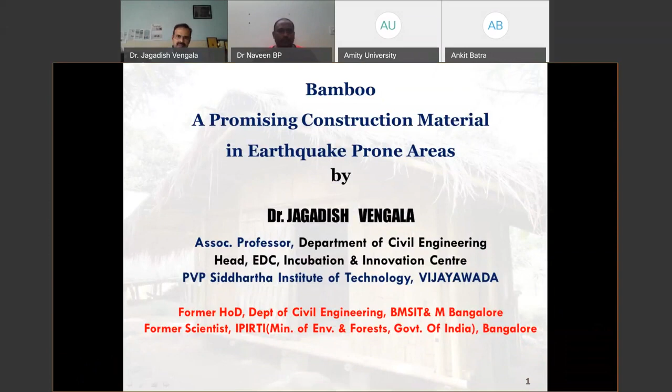The outline of my presentation goes like this. I will give a brief introduction about bamboo and bamboo-based construction, and then talk about my time working in a Government of India organization called IPIRTI, where we developed a bamboo housing system. Briefly, I'll give you some engineering properties of bamboo that I tested over a period of time as part of my thesis and my work. Having tested the properties of bamboo, we also tested various elements in the housing. I will show you how a 2-story bamboo house looks like, and some of the performance tests conducted. At the end, I'll discuss how it performed as an earthquake-resistant material with tests we carried out on a shake table. Finally, I'll end my presentation with brief conclusions. After my presentation, I will answer some of the questions raised by the audience.

With a brief introduction about bamboo, I'll start. In India, there are about 125 indigenous and 11 exotic species, belonging to different genera. Bamboo comes from the grass family, and bamboo availability is about 14 million hectares in India.

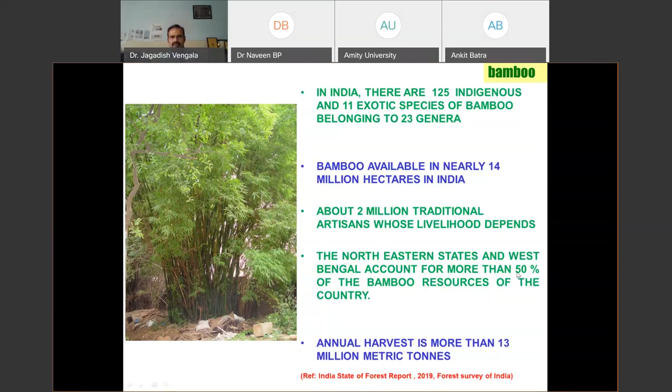Out of the total bamboo, as I mentioned, most of it grows in the northeastern part of India. You can see this on the map, along with Madhya Pradesh, Maharashtra, and other places.

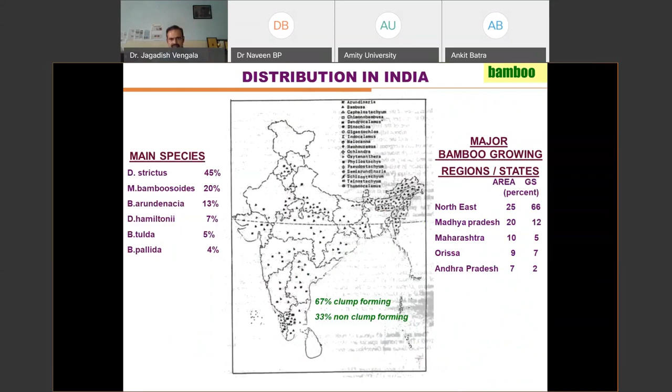That means for each rhizome, one single bamboo comes out in case of the monopodial, whereas sympodial has a number of bamboos. That is how it forms the clump and non-clump types.

An interesting thing to know is that in 2017, the Indian Forest Act was amended, particularly for exempting bamboo grown outside forest areas, so that you can cut it and use it for different purposes. It's not like when you have to cut a tree in your campus, where you need permission from forest officials. By amending the Indian Forest Act of 1927, the felling transit permit for transport and economic use has been removed. This is based on the Indian State Forest Report.

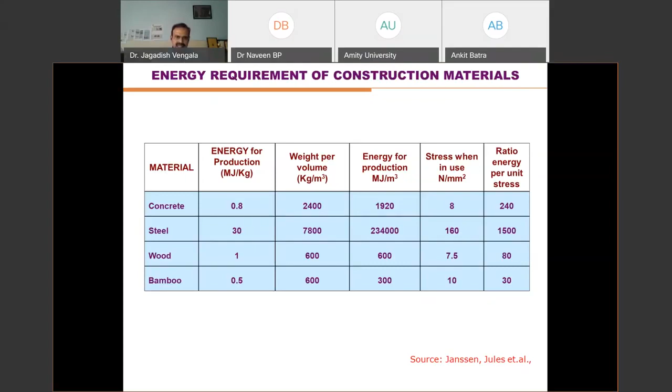Based on calculations made by Jules Janssen, a very good researcher in this area, when you compare different materials in terms of energy production per kg of material, bamboo is clearly promising compared with other building materials. Even when you calculate the ratio between energy per unit stress, bamboo gives a promising value compared with other building materials like concrete, steel, or wood.

As civil engineers, we need to understand the orientation of fibers and their properties. Bamboo is hollow inside, and between two nodes this hollow portion exists. If you split it vertically, you can see both halves of the split bamboo. This solid disc portion is called the node. Between two nodes is the hollow portion, and all the fibers run parallel to the axis of the culm.

Species to species, there is variation because one particular species has more fibers within the system. If there are more fibers, you need more energy to fracture the material. That is the difference between different species.

When you try to nail the bamboo, what happens? These longitudinal fibers give way to the nail, unlike wood. Wood contains radial fibers, so it takes the nail into it. But in case of bamboo, if it is thin-walled, this is called the wall portion - that is outside diameter minus inside diameter. If it is thin in nature, when you nail it, it gets split because the fibers give way to the nail. So you have to carefully work with bamboo.

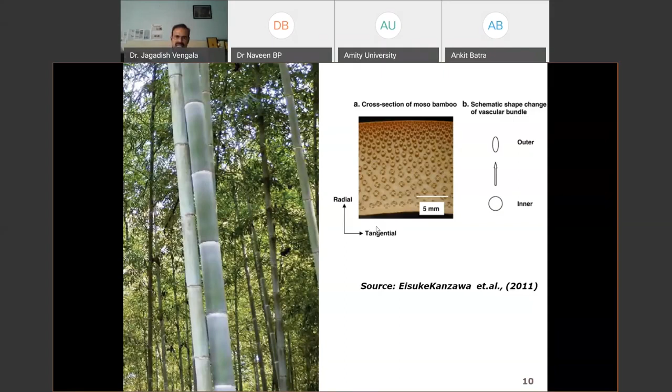Bamboo is used for various purposes. If it is less than 30 days, it is good for eating - a lot of people make pickles and curries in Northeast India. At 6 to 9 months, bamboo is tender; you can take out slivers and weave baskets and other furniture. At 2 to 3 years, they again make slivers or strips, which can be converted using resin into composites like bamboo matboard or corrugated sheet.

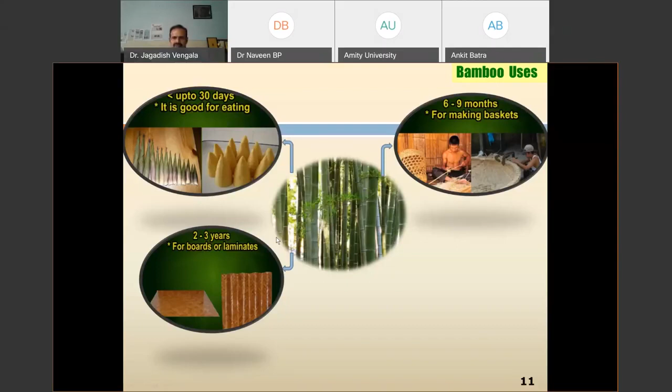A number of composites or laminates can be made out of bamboo strip or sliver-based composites. At 3 to 6 years, bamboo is generally used for construction purposes. After 6 years, since it is exposed to weather, it gradually loses strength. So it's better to choose bamboo of age 3 to 6 years.

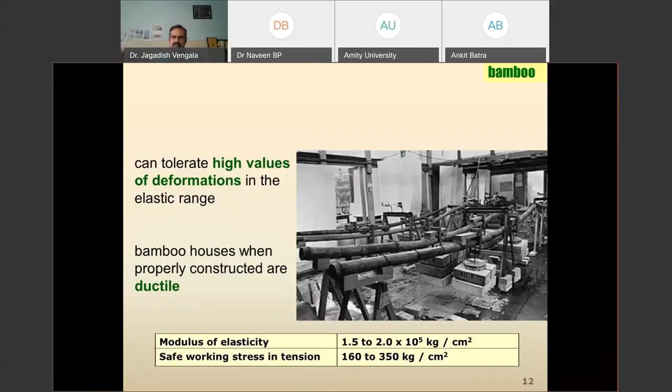When you apply load, it deforms. So bamboo can tolerate high deformations. It is obvious that when you make a house using bamboo, those houses are ductile in nature. And these are the traditional bamboo houses you can see in the Northeast.

They also flatten the bamboo. They split it into two halves, and then flatten it. These flattened bamboos are weaved, and they can make bamboo mat boards. These mat boards are used as walls. It's like fabricated walls, where they make a framework using wood or steel, and then place these mat boards to build the houses.

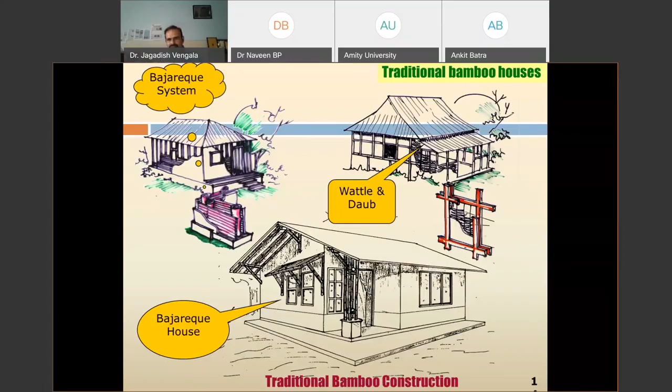These are the typical kinds of houses you see in the northeastern part of India. There are traditional bamboo houses practiced in various parts of the world, like the kind of houses you see in Colombia and South American countries - bajareque system, wattle and daub system. You can see bamboo strips placed within a frame, then weaved and plastered. These kinds of houses have proven to be earthquake resistant.

There is also a problem with the difficulty in joining various elements, and lack of structural design data - till recently there was not much data available with us. And then there's exclusion from building codes.

An interesting point to mention: till 2005, the National Building Code of India never mentioned bamboo as a building material. For the first time in 2005, the National Building Code of India, Part 6, Section 3 - earlier they used to talk about only wood, and then they divided Section 3 into Section 3A and Section 3B. 3A talks about timber, and now 3B talks about bamboo. You can find it under Part 6, Section 3B, covering bamboo and its various properties.

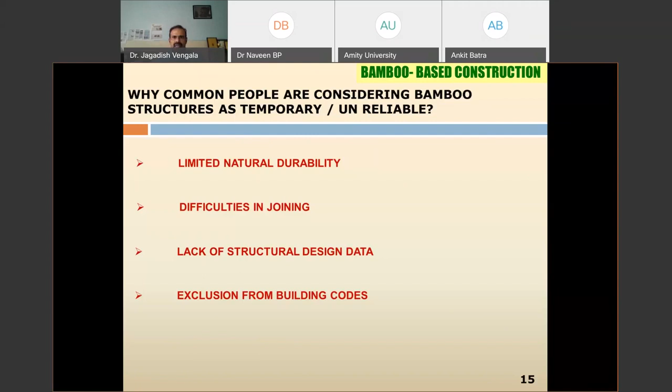Over time, natural durability has been addressed by giving suitable treatments - there are a lot of preservative methods and chemical treatments available, and many joinery methods were developed. Because of the work of various researchers and scientists, a lot of structural design data has been generated, and people started using it. This is why, for the first time, the National Building Code of India 2005 included bamboo as one of the building materials.

As I mentioned, bamboo can be converted into composites - bamboo mat boards, that is flat boards, and even corrugated sheets or veneer composites. How do they do this? Usually, the tender bamboo is converted into slivers. These slivers are weaved to make mats using weaving patterns. There are generally two types of weaving patterns.

One is the rectangular pattern, and the other is the herringbone pattern. Various studies conducted on these two types of patterns found that the herringbone pattern gives more strength, particularly when converted into a composite material.

So that is how you use these mats. These mats are dipped into resin, and then the dried mats are placed again on a hot press. If it is a flat die, you get the flat board. If it is a corrugated die, you get the corrugated sheet. You can see both components.

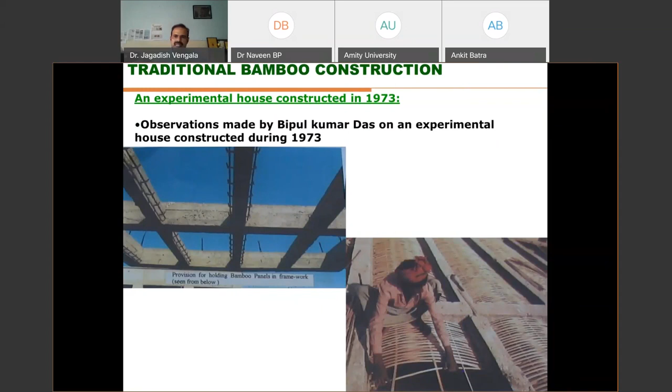There is a case study. Mr. Bipul Kumar Das constructed his house in 1973. He weaved an arch roof kind of thing using bamboo strips, with columns and beams as an RCC frame structure. He wanted to go with bamboo strip-based bamboo composite roofing. So what he did was make the arch roof and then place the mortar.

After 25 years, he wanted to demolish the house. So before demolishing it, he wanted to check the condition of the bamboo. He stripped out the mortar, and you can see that after 25 years, that 1.8 meter span bamboo strip arch, one person could still stand on it. What this case study shows is if you utilize bamboo properly, you can create wonderful structures. That's what I meant by giving this particular case study.

As I mentioned, I was working with IPIRTI. When I was there, IPIRTI developed, in collaboration with TRADA, a kind of bamboo housing system. TRADA is a Timber Research and Development Association in the UK. So I will explain the features of this kind of housing system.

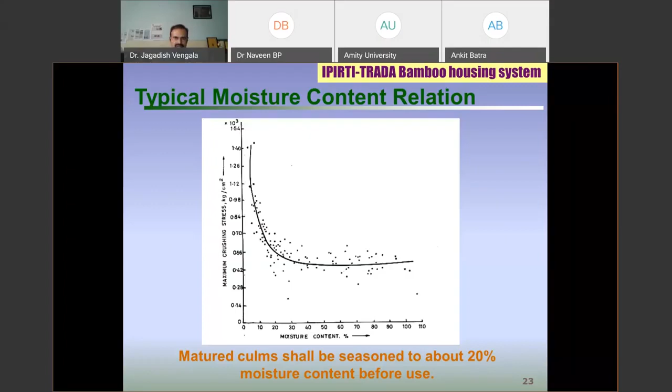So strength increases once you bring down the moisture and season it to the required moisture content. Coming to selection of bamboo for construction purposes, you have to choose bamboo of diameter 2 to 3 inches, that is around 50mm or 75mm, for purlins and beams. For columns, you can choose outside diameter of 75 to 100mm, meaning approximately 3 to 4 inch bamboos are preferred.

Wall thickness is very important. You should choose a wall thickness of minimum 10 to 12mm. When you cut the bamboo, it is tapered in nature, one side has one dimension, the other side has another. So at the least side, you should maintain minimum wall thickness of 10 to 12mm. Internodal distance is preferable to be less, because based on studies, the less the distance, the more the strength. And you should not peel out the outer layer because it contains silica, which gives a lot of protection to the bamboo.

When you select bamboo, it should be free from defects. This is the kind of grading you have to do. It should not be too sweeping in nature, and the National Building Code of India gives grading rules for what kind of sweep you should avoid. You should also avoid crookedness in the bamboo, it should be as straight as possible, particularly for columns, beams, or trusses. So selection and grading is a very important parameter in house construction.

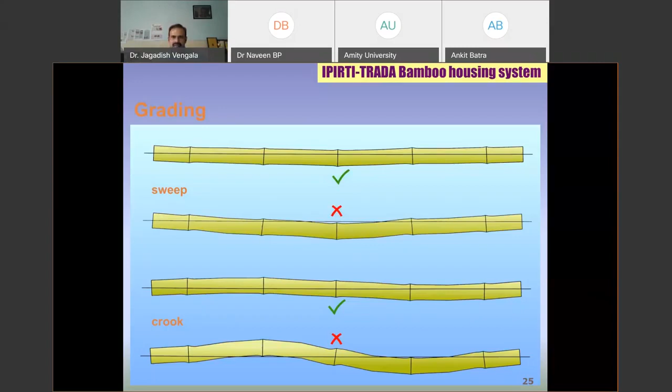Coming to the treatment of bamboo, treatment also plays a major role, because once you have treated and graded bamboo, you can make any kind of structure based on your design or interest. So treatment plays a very important role.

Usually, you go for 3 to 4 types of treatment: internodal injection, hot and cold treatment, dip diffusion, and Boucherie process. In all these methods, you can use any kind of preservatives which are used for wood.

But in internodal injection and hot and cold treatment, we use the oil called creosote oil. Creosote oil is a coal tar derivative, and heavy creosote oil is used for treating these bamboos. You might have seen the light creosote oil used as a mosquito repellent in villages, that spray they do. That is like light creosote oil. So when you dilute the heavy creosote oil, you get the light creosote oil. Basically, the solid particle content in the creosote oil gives that heaviness. So you have to use heavy creosote oil for this purpose, and internodal injection and hot and cold treatment are carried out using the creosote oil.

And then in dip diffusion method, we use boric acid-borax solution. You take water and make the solution using 1.5% of boric, and anyway, I'll just quickly explain.

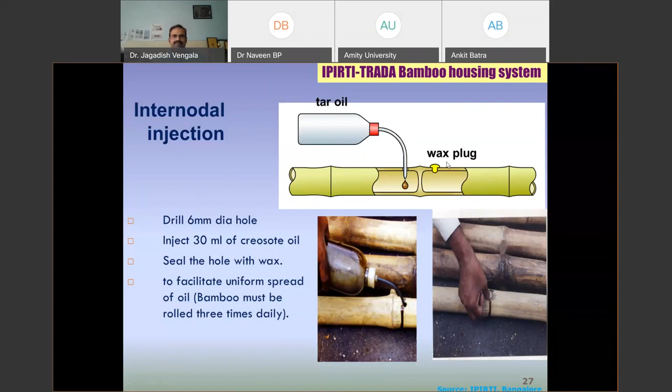In the hot and cold treatment, usually the column portion of bamboo goes below the ground level. So this portion you have to treat using hot and cold treatment. You cannot go for the internodal injection, because you are going to bury the bamboo portion below the ground level. Similarly, when you go for the foundation buried under the soil, in case of concrete, the concrete which you are placing below the ground level, you go for the moderate exposure. So the exposure level is different, and that's why you go for M25 grade of concrete.

Similarly, because of the kind of aggressiveness that is there below the ground level, you have to treat using the hot and cold treatment. For this, you have to place it in the drum and heat it for 1 hour, and then keep the bamboo as it is and cool it in the same oil for 24 hours so that the entire bamboo portion gets treated.

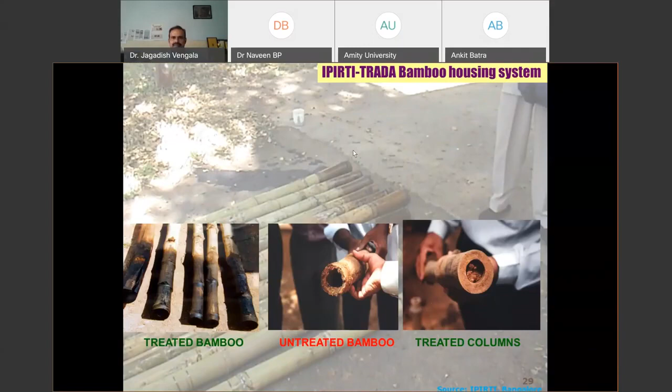The other method is the dip diffusion method. Here, if you take 100 liters of water, you have to add 1% of boric and 1.5% of borax. 1% of 100 liters is 1 kg, and 1.5% is 1.5 kg. You mix it in the water to make a solution, and then you dip all the bamboo, or whatever you want to treat - truss, purlin, or split bamboo - you submerge in the water for 2 days and then allow them to dry for a week. And then you can use it for whatever purpose.

Why there are two different methods, I will explain in the coming slides. Like other constructions, the load coming from the upper floors and the self-weight of the entire building gets transferred to the foundation. But in normal buildings, large and huge loads are coming. In case of bamboo, however, it is very light in nature.

So you need not go for the foundation more than 2 feet. Actually, one and a half feet to 2 feet foundation depth we go for. Anyway, in regular buildings, you have to give the anti-termite treatment.

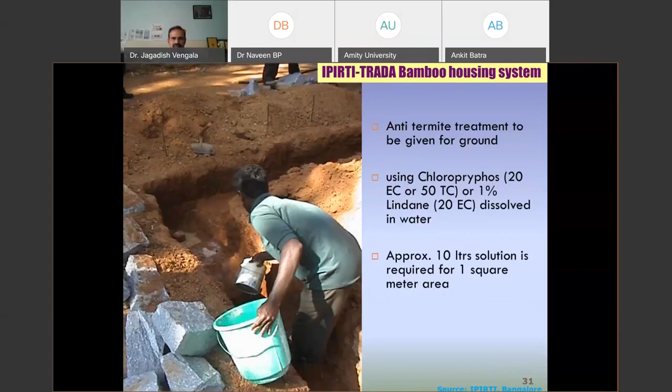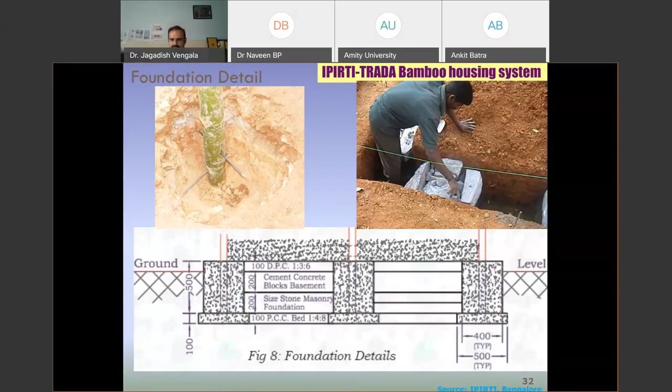After that, you have to place the columns. Wherever columns are coming, you go for a concrete footing of 1 foot by 1 foot, and in the rest of the places, you can raise cement mortar or solid block masonry footing. These columns are spaced at a distance of 4 feet, and one can go for even 6 feet. I will explain the span between columns in later slides, why or why not. Between the columns, they're connected using the top wooden plate, and between the columns you place the strip grid.

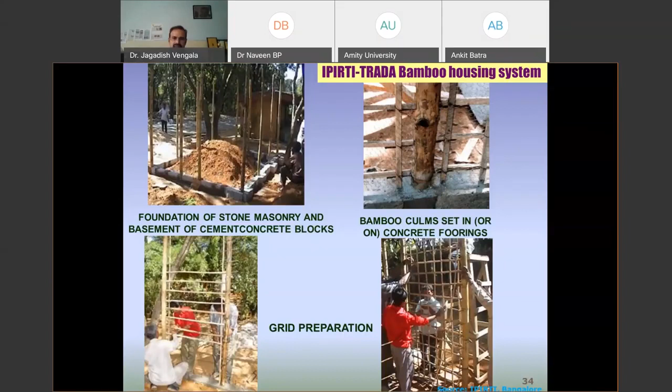This is just like a balcony. You place the fiber reinforced, ferro cement kind of concrete. Here, you place a bamboo strip grid of 6 inch by 6 inch between 2 columns, and then chicken mesh is tied to it, and then plastered one coat, and then wait for a day, and then it gets hardened, and then you can go for the final finish.

On the top wooden plate, you can place the bamboo trusses, and over the bamboo trusses, you can place the purlins. Over the purlins, you can place the sheets, and these sheets are connected to the bamboo purlins. That's how you make the house.

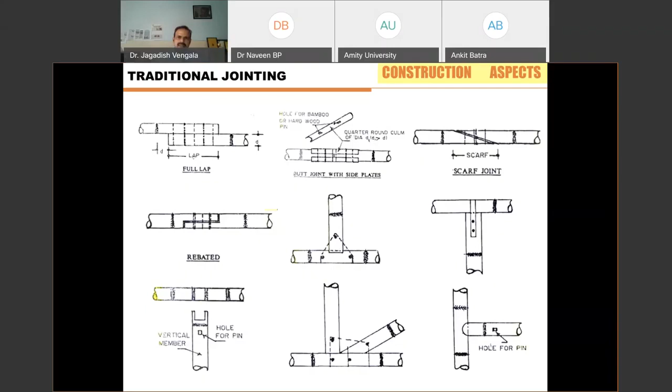There are traditional joinery methods available in the northeastern part and also various parts of the world, the practice. These are basic joinery methods like full lap, butt joint, scarf joint, rebated joint. Using natural jute fiber or bamboo fiber, you can connect these elements for making or converting into a proper truss element or any other beam element and so on. Usually natural material is used. This is a way of traditional joinery.

But the problem is when you connect various elements like a beam or column using the natural or joinery methods with bamboo or jute, due to seasonal changes, weather changes in winter and summer, due to expansion and contraction, these joints get loosened. So what happens is the joint fails, then the element fails, and then the house fails over a period. That is why, compared with modern joining methods...

There are modern joining practices, taking inspiration from steel trusses or steel structures. You can see the gusset plate and nut and bolt concept. Same thing here, but here you need not use steel plates as a gusset plate. You can use either marine grade plywood or bamboo mat board or bamboo mat composite board as a gusset plate. You place the bamboos, and the gusset plate is fixed on either side, and then using nut and bolt you can connect the bamboo elements.

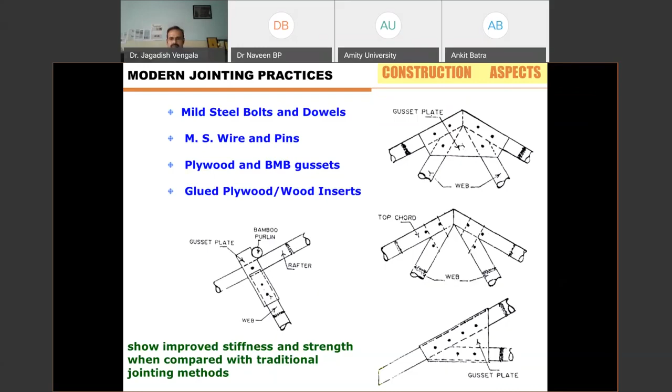You can see the gusset plate and then nut and bolt. Above the trusses, you can see the purlins — it's a half split purlin. Over that, you can place the sheets. These sheets are connected using the regular sheet connecting method, like J bolt, nuts, and washers.

Coming to the treatment, as I mentioned already, let us see what kinds of treatments are involved in various portions. For the columns, as I mentioned, the boucherie process, or the hot and cold, or internodal injection. In case of bamboo strips and other portions, you go for dip diffusion, because the purlins, trusses, or strips are covered.

Because the boric-borax solution has a property of leaching out, I think you might have heard of boric powder used for regular purposes. Whoever has played carom board knows we place boric powder on it. Whenever I ask what the boric powder is used for, they say it's for smoothness.

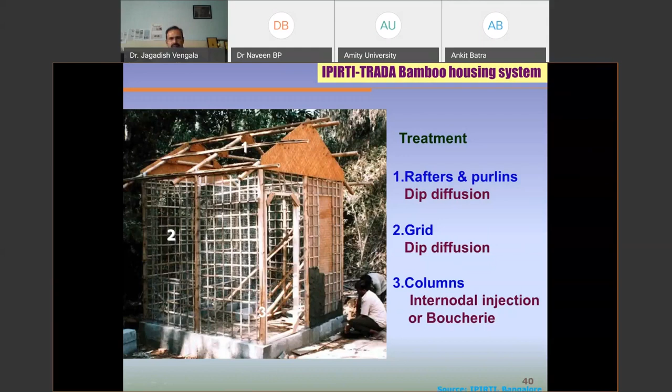Coming to that, as engineers we need to understand the various strength and elastic properties of bamboo. As part of my thesis, I carried out different studies on a particular species most commonly available in Karnataka, called Bambusa bambos. I have carried out different tests starting from compression, flexure, shear, free vibration, and full scale tests.

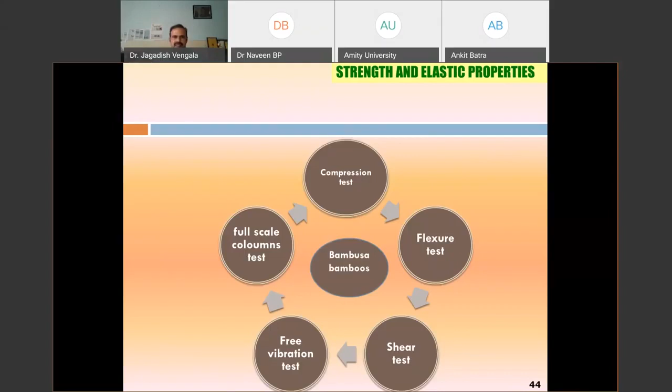If you look into the bamboo, as I mentioned, nodes are there. If you take a 6 feet bamboo, there are a number of nodes, and between nodes you have a hollow portion. If you take the entire length of the bamboo, there are 3-4 combinations you can take out. I have majorly taken 3 combinations: one completely hollow portion, one with a node at the middle, and one with node on either side. So I took a 1 feet bamboo and checked what happens if it is hollow, if the node is in between, or if the node is on either side.

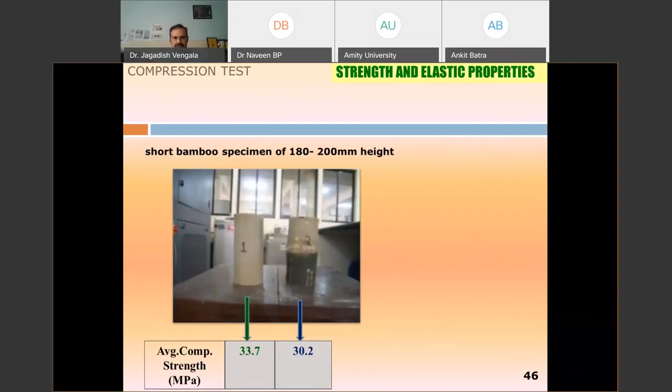We also checked the shear test. Shear is a very important parameter, particularly for bamboo housing. When you make bamboo trusses, the joints are connected using nut and bolt. Due to any forces, there is movement of these trusses, and when there is movement, it transfers to the nut and bolt joinery. So there is a shearing effect between the bamboo and the composite board, so it's very important to know the shear property.

In case of bamboo, we designed a method and checked the shear strength of the bamboo. The average shear strength we got was 7.78, with a range between 4 to 11 MPa shear strength for the particular species of bamboo we chose for our studies.

A very interesting study we carried out, taking inspiration from some other material. Arun Kumar and Saikia carried out this work at BMS College of Engineering, Bangalore, wherein they conducted studies making columns, keeping one side fixed and tapping the other side, recording vibration measurements, and using the free vibration test to measure the modulus of elasticity of the bamboo.

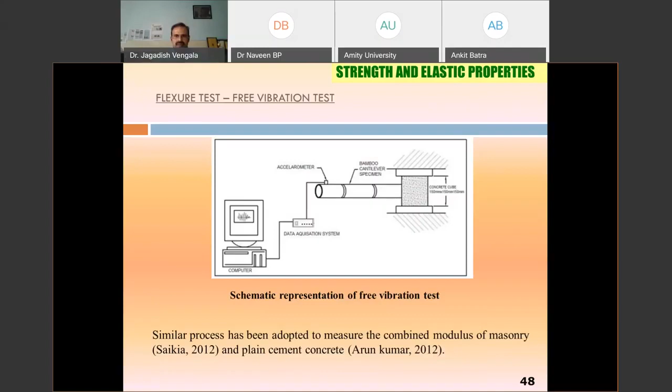So we have done similar studies—we actually cast the bamboo mounted inside a cube, fixity is created, and then we just tapped it and measured the accelerations.

Based on the data we got, you can convert that into compression modulus and tension modulus. Once you get the compression modulus from the previous experiment, based on the combined modulus you can even get tension modulus. That is how the experiment is carried out.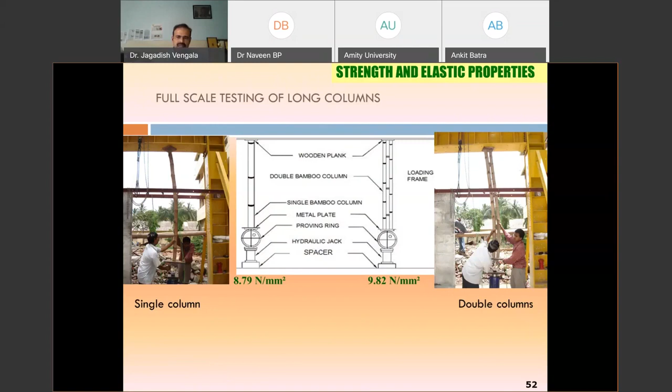Some observations on cracks were noted. We could take a particular load, and a typical 7-feet bamboo of 4-inch diameter and 12 mm thickness can take half a ton of load without any deflection, based on the studies we conducted.

After conducting studies for 8 feet, we also checked what happens between 1.25 meters and 1.5 meters, and we could see the values for different lengths. As you know, when length increases, the load capacity decreases because it buckles.

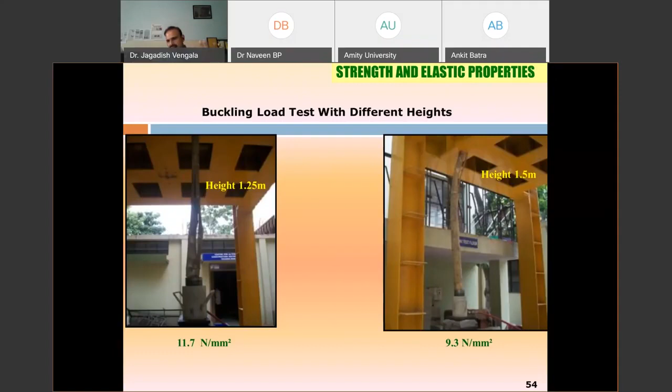We plotted all these results. Initially we carried out studies for 1 foot bamboo and then 8 feet bamboo. We wanted to check in between, so we drew the curve of stress versus slenderness ratio. You can see the values, and the middle bamboo columns we tested fall within that range.

We also carried out tensile tests on bamboo strips. Many times people say bamboo is comparable with steel - yes, it is comparable on one particular property, the tensile property. The tensile stress of bamboo is around 75 MPa, and some bamboos are even higher, which is comparable with steel. That is what people mean.

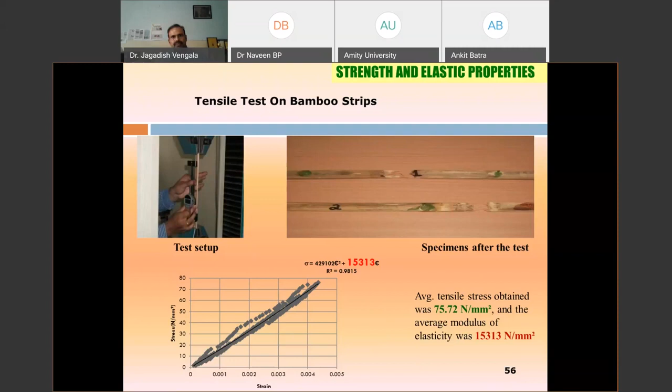Having conducted various property tests on bamboo of a particular species, we also used the same bamboo to make different elements of the house and tested them. You can see the wall elements, truss elements, and roof elements.

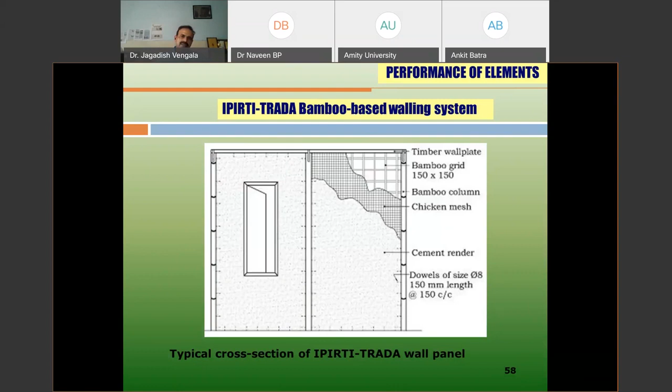This is the IPIRTI-TRADA bamboo-based walling system, as I explained in the earlier slide, where bamboo is placed between 2 columns. This is 6-inch by 6-inch, then plastered. Mesh is tied to it and plastered on either side. This is the typical cross-section of the bamboo.

These are the various tests we have conducted - you can see shock resistance test, impact test, racking resistance test, and a lot of joinery tests also conducted on these.

This is a test conducted after I joined, where I wanted to check - many people ask, sir, what is the span between the 2 bamboo columns? The span between the 2 bamboo columns we used to go up to 4 feet.

Then I did a study: what happens if we go for 5 feet? What happens if we go for 6 feet? What happens if we go for 7 feet between 2 columns?

After conducting various tests - racking test, soft body test, light body impact test, soft body impact test, and various others - we understood that up to 6 feet there is no problem.

We also replaced 1/3 of the cement with fly ash, and we understood that finishability improved, and the wall is good, showing no damage with minimal deflection, particularly for the racking tests.

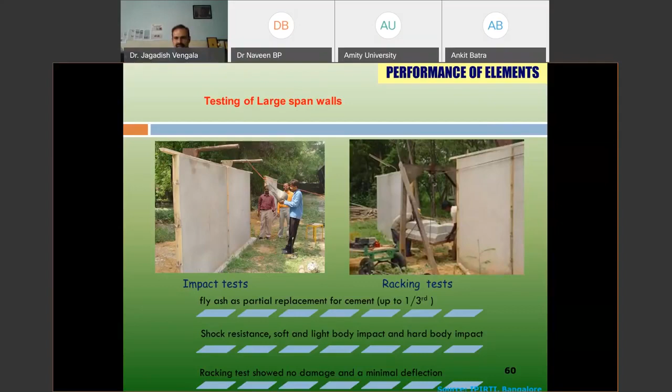Many people ask about the fire resistance of bamboo. If you take any bamboo, if it catches fire from the ends like fiber openings, then it catches fire. But if you keep the fire on the surface of the bamboo, it blackens the surface and will not spread.

To show you, once it's converted into a composite, you can see here fire is placed on a bamboo composite - it's a corrugated sheet. You can see, once you light the fire.

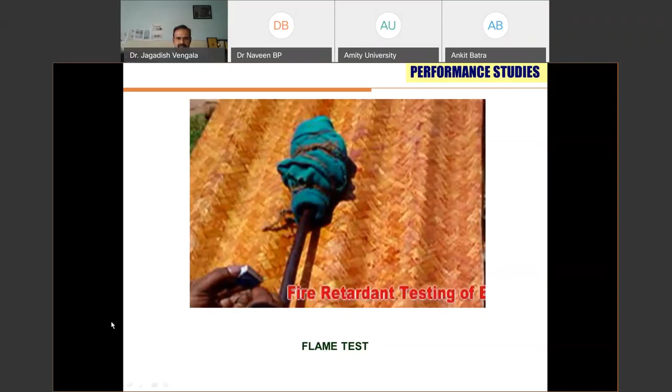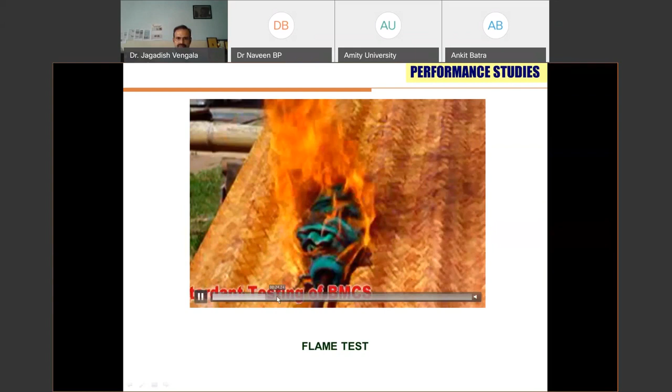They checked it almost till the fire ends. You can see it is blackening the surface. In the composite sheet, you can see the back side of this portion. Wherever it occurs, it blackens the surface, which means it won't catch or spread the fire.

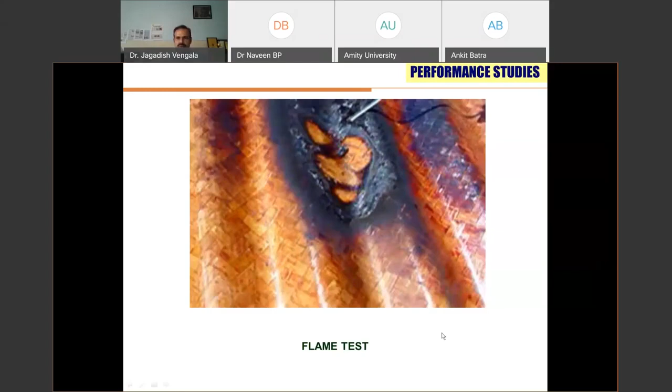So just wanted to give you an overview. I showed this particular video, and having conducted a number of studies, we also tested different trusses, starting with a 3-meter truss, 10 feet truss, and then 4.27, 5.5 meter, and we understood various types like king post, queen post, and different trusses we tested.

You can see the results, and when we check the design load, when we place the maximum load, it is taking almost 2.5 times the design load, with minimum or maximum deflection, whatever people say. So having tested a number of trusses, we thought conducting studies alone doesn't serve the purpose.

We extended this, giving the data, values, and truss details for the extension part. Many people were inspired, and for some industrial sheds, instead of going for steel trusses, they went with bamboo trusses. You can see here in this picture.

Even the composite deck slabs were tested. You can see here, the same bamboo strip grid and cement mortar, a similar kind of wall arrangement, has been used for the slab also. We checked the composite deck slab, and it is taking the required load with minimum deflection, within the limits after checking the slab.

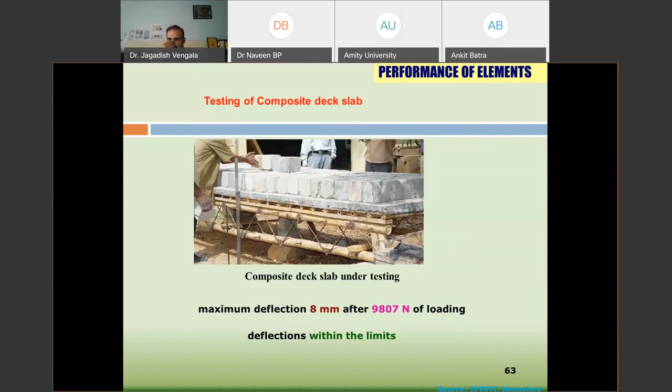This is a two-story house, and you can see the slab and the beams. Using the data from what we tested in the columns, we actually built the house. This is a two-story bamboo house. The back side portion we have raised, while the front portion is the same.

Various foundation detailings, and you can see when we tested both single and double bamboo columns. Double bamboo columns were used in the backside portion of the house, where we wanted to go for the second story. So wherever the load coming is high, we used double bamboo columns.

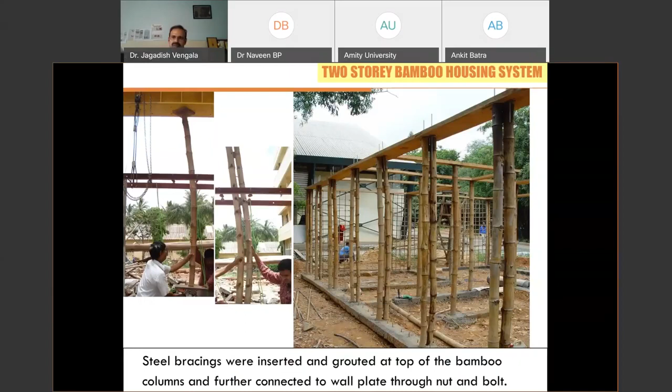A little amount of steel is used just to connect the various elements of bamboo, to the wall plate, to the next column coming on the upper floor. Nut and bolt is used. You can see this is a composite deck slab, and here is the inside.

Some construction aspects: if you have more contact area of the bamboo, it always takes more load. When you cut the bamboo and place it as a column inside the foundation, the bottom portion may be hollow, so crushing can happen. So you have to close it, either with a wooden peg or by filling it, so there's enough contact area for the load from the top to be effectively transferred to the ground. Basically, you have to improve the cross-sectional area of the bamboo.

These are some of the connection detailings in the bamboo house, where you can see the little amount of steel, different L angles, Z angles, in the beams and columns. This is a typical landing beam of the staircase, where the column comes from the ground floor, then there is a beam, and this column goes to the first floor column, and this is the landing beam. This connection detailing is very important in a bamboo house if it is a complex structure.

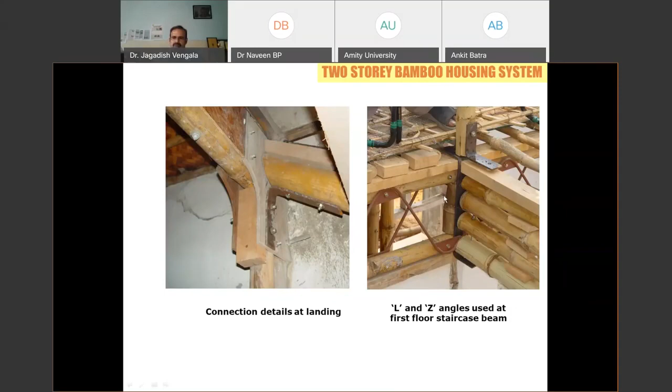Even box windows can be constructed. You can see here, using the same bamboo strip grid and chicken mesh, then plastered. You can use L-shaped angle steel rods, connected to the main wall. You can see the box grid using bamboo grid wall technology for box windows.

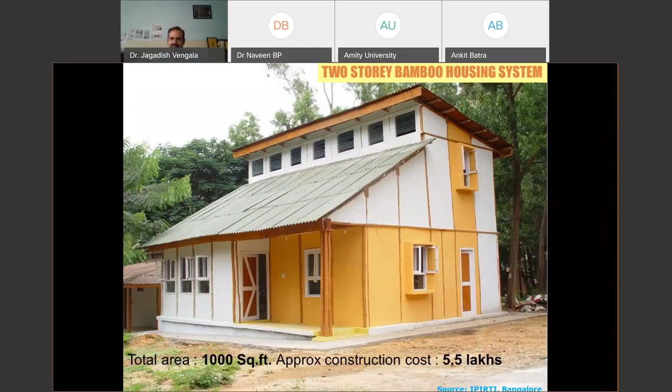This is the inside portion of the bamboo structure, and at that time, in 2007, it cost approximately 5.5 lakhs for 1,000 square feet, which is approximately 550 rupees per square foot.

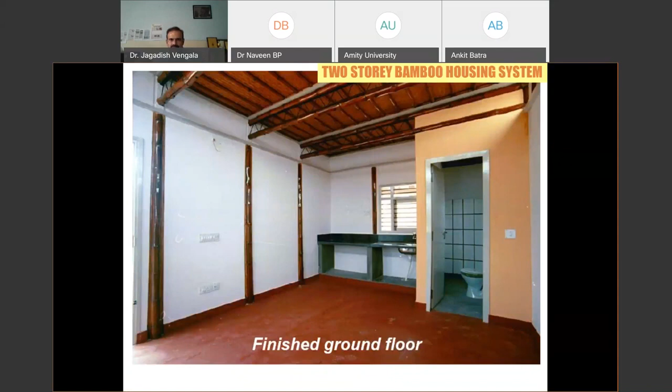This is inside the finish of the ground floor of the house. You can see the kitchen and bathroom, nice colors you can give. Then these are the columns and the trusses. This is the first floor portion, and this is the balcony using the same bamboo elements, various trusses. This is a completed building. You can see the stairs, balcony, and then first floor.

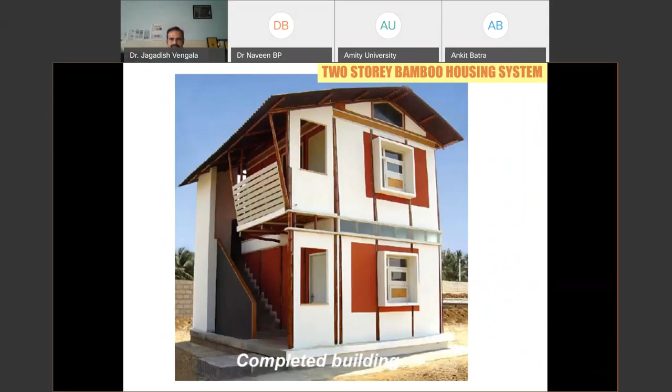Coming to the performance studies on bamboo-based housing, particularly the seismic performance studies, having given the introduction about the bamboo, various species, treatment, and the various construction aspects and the IPIRTI-TRADA bamboo housing system, let us now understand how this bamboo house can be effective in giving good seismic performance.

Before that, I would like to give some traditional concepts prevailing in the northeastern part. There is this kind of Ekra type of housing system. This house is made using the Ekra type, wherein up to 1 meter above plinth level, they go ahead with stone masonry walls. Above that, they make wooden frames - you can see the green or blue color wooden frames. Between wooden frames, woven bamboo mats are placed and plastered with cement or mud mortar. Even for the reed, what we call Ekra, is used in both the walls and the roof portion.

These houses, particularly during the February 2006 and September 2011 Sikkim earthquakes - you can see the magnitude - due to these earthquakes, there was no injury caused due to falling. There was falling of debris that happened, but there was no major injury because of the lightweight structures. The only thing is, it may not be suitable for construction of storeys, because up to 1 meter height you go with the stone masonry, which is rigid in nature, and above that you have this kind of walling system. But this is also a very interesting housing system wherein it is earthquake resistant.

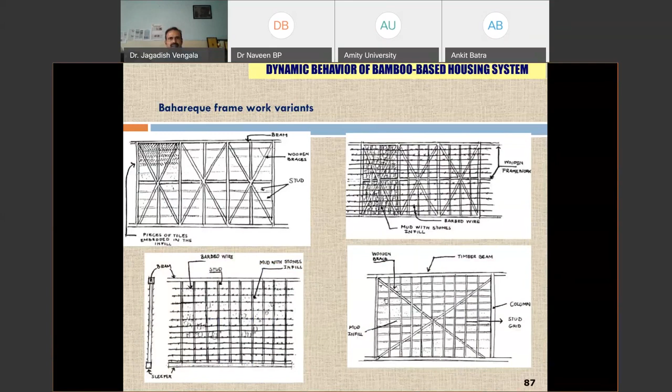One more very interesting housing system you can see in Srinagar and other areas is called Dhajji Diwari construction. Here, you are having wooden frames, and between the wooden frames you are placing either burnt clay bricks or stone. So these timber frames, in this Dhajji Diwari type of construction, confine the elements of masonry or bricks with timber elements, so that diagonal shear cracks will not propagate from one panel to another, and out-of-plane collapse is reduced considerably because of this kind of construction.

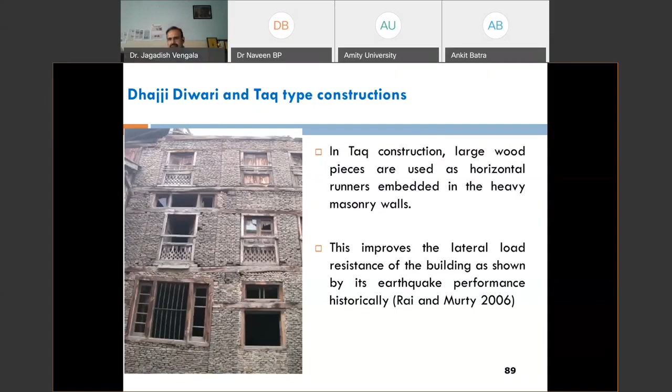There is one more type of construction called Taq construction, wherein large wood pieces are run horizontally and embedded. Above these horizontal runners of timber, wherever a window is there they place window frames, and in other places they just place stones or whatever elements. This also improves the lateral load resistance, historically based on various earthquakes, as reported by Rai and Murty in 2006.

As I mentioned with Dhajji Diwari construction, some students from Srinagar carried out studies because timber is getting scarce - why not use bamboo in place of timber? So they carried out studies using similar wall panel types, with different kinds of wall bracings, and tested them for lateral load carrying capacity. When they compared with the timber frames, they observed that bamboo is taking almost 1.5 to 3 times better lateral load carrying capacity compared with the timber frame.

These are the bamboo bahareque buildings you can see in South American Colombian countries and other places where you get the sympodial bamboo.

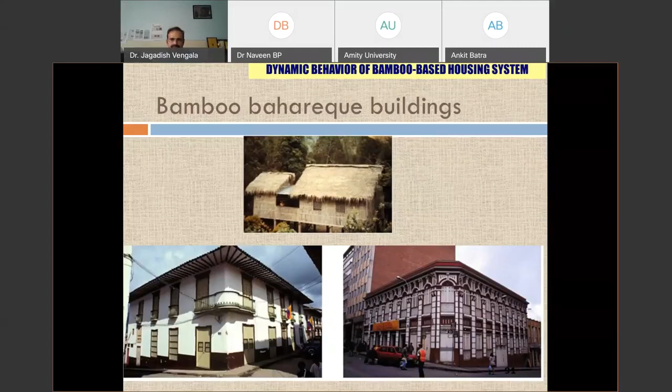As I mentioned, places like El Salvador have these bamboo bahareque houses. But the 1986 San Salvador earthquake and other El Salvador earthquakes affected these houses, even though they are bamboo houses. When they found out the problem, there were issues like using timber as a foundation. This timber used to get rotten inside, and there wasn't a proper connection between the different elements, so these bahareque houses also got damaged.

So what they did was make structural bahareque, and then started conducting monotonic loading tests on various wall elements.

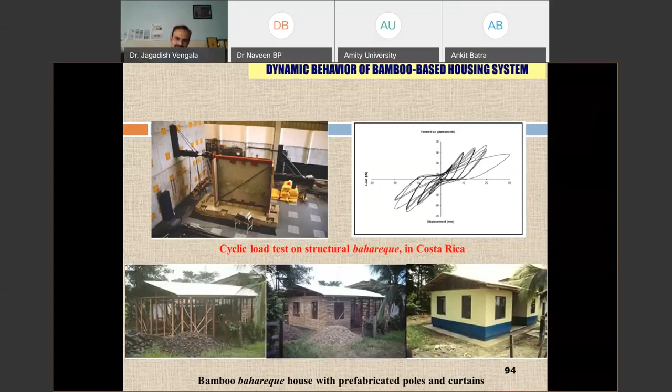Based on studies carried out at some universities, you can see cyclic loading tests also of the structural bahareque in Costa Rica. Based on this, they built various colonies with the improved bahareque system. This is the undamaged bahareque house after the 1991 Costa Rica earthquake. After the improved version was implemented and the houses built, these houses remained undamaged after earthquakes occurred in those places.

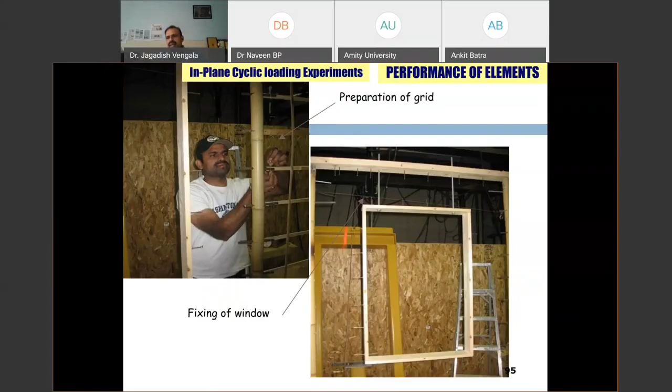As part of my Government of India Fellowship, I carried out some studies at Colorado State University, USA, where we built two different wall systems and carried out cyclic loading tests. You have to make your own walls there; nobody helps you. When you go to a foreign university, you have to spend a lot of time building the elements. So these are the two walls I made myself.

You can see here the window, one with window and another one without window. These are the finished walls, and we carried out the cyclic loading test on them.

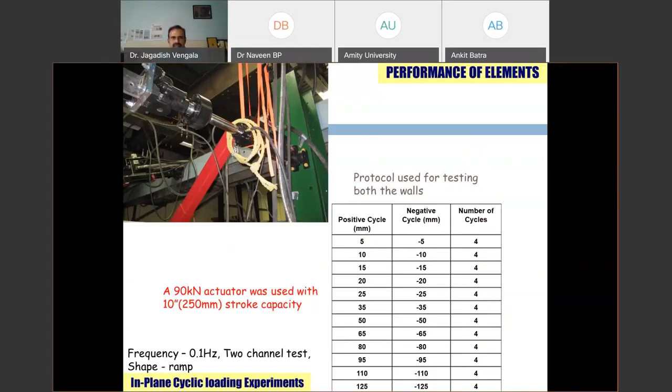This is the protocol: a 90 kilonewton actuator was used, with a stroke capacity of 10 inches overall, and 1 inch increments. We gave a number of cycles and carried out the cycling. After the test results, we observed that there is a crushing in the middle of the bamboo.

Why did this happen? I'll tell you. As I mentioned, you have to use a minimum wall thickness for bamboo. Here we got the minimum wall thickness, but luckily this particular university had brought the bamboo for a different purpose.

Usually on weekends, they go mountain biking. So when they go mountain biking, if someone falls from the mountain, there should be some kind of barricade. So what type of barricade did they want? They brought bamboo and made different barricades with different configurations, and checked how well it could resist impact, because bamboo can resist impact loads very well. So they made the barricades so that if someone comes and hits them, nothing happens, and the person can rebound. That's why they brought this particular bamboo.

These bamboos are thin in nature, but taking the worst bamboo and testing it always gives you some kind of idea if someone uses the worst bamboo at the site. So we have to test it, taking all conditions into account.

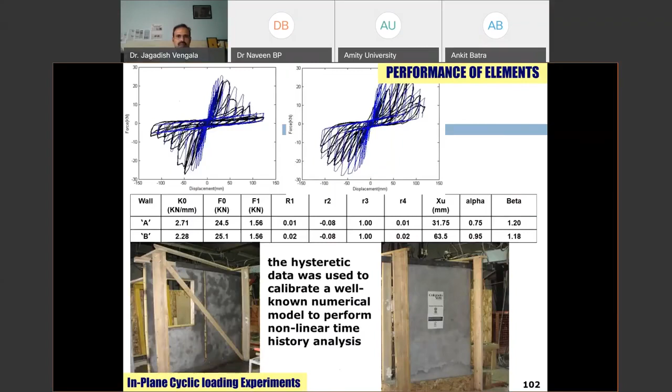So these are the in-plane cyclic loading experiments, which we then numerically modeled based on the data. This is the cyclic loading and numerical data, what we call hysteretic data. We got it for both the wall with window and without window.

Having known these values, we thought of numerically modeling the house itself. There is already a house that was tested, an 8 feet by 8 feet house. We input these results into an incremental IDA analysis carried out using software called SAPWood, where you can input the earthquake, give the house values, and then place the loads.

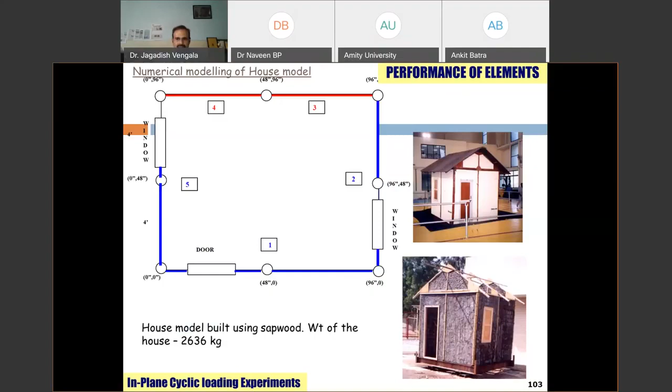For different loading conditions, you can see the drift and acceleration. Suppose you place 1000 kgs on the roof of a particular 8 feet by 8 feet house; this is the percentage of drift relative to the spectral acceleration. When we checked both for 20 shallow US earthquakes and the Bhuj earthquake, the responses were found to be very good, with low drift levels even at high seismic intensities exceeding the design level. But overall, the results are good.

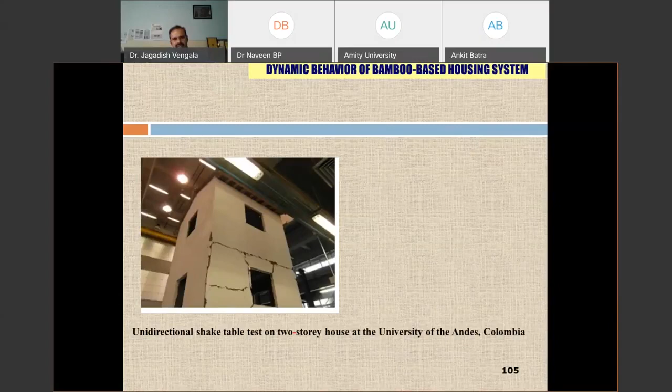These are the studies conducted at the University of Andes, Colombia for the shake table test on this two-story house. This is the last part of the seismic tests I conducted as part of my thesis. Seismic performance of a particular building can be assessed either using the shake table or shock table.

As part of a National Science Foundation project in the USA, we carried out the world's largest shake table test on a 7-story, 60 feet by 40 feet wood building. I was part of it. I was in Japan for 2 months and personally carried out a lot of damage inspection studies.

Let me give you some differences between the shock table and shake table. The shake table can simulate motion in 3 directions, while the shock table is only unidirectional. The installation and operational cost is very low for the shock table, but very high for the shake table.

In the shake table, you give the data, and once the test ends, you check what kind of damage occurred. In the shock table, you give shocks one by one and observe the shock pattern or crack progress in the building. As mentioned, shock tables are uniaxial and mainly used for simple building models, while shake tables can be triaxial and used for any type of structure. With shock testing, you can study the response after each shock, but with shake table testing, you check only after the complete input has been applied.

We were actually doing installation work, and after that a big test carried out in July 2009. I was inspecting during that time, and I trained almost 30 Japanese students to inspect the damage inside. That was a very good experience - for each input given, we went in and inspected the damage, wearing bands. There is a systematic procedure to test any kind of bigger building or testing program.

We had to follow proper guidelines. We were trained on what procedures to follow after the test program, because safety is the major priority. We did that and took measurements. So this is the shake table test I was personally involved in.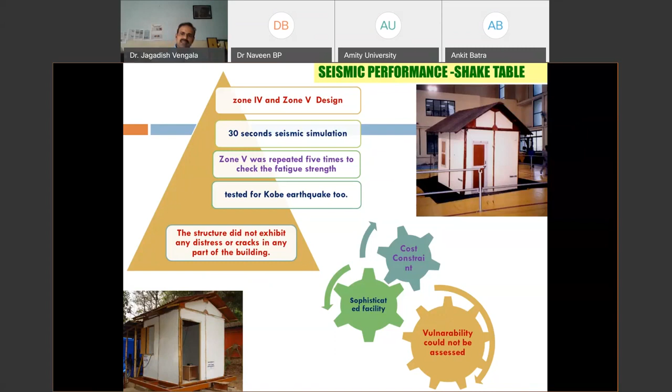So then I thought, having the previous proven record of testing building models on shock table by my guide, Dr. Raghunath from BMS College of Engineering, and his guide K.S. Jagadish, who carried out studies at different places like Nirma University campus Ahmedabad and IIT Roorkee, the shock table gives good results. Having this previous record, we thought of conducting studies on the shock table. So I fabricated the shock table.

The shock table is mounted, and to design it, it is very important to know the building weight. Typically, a bamboo building of 8 feet by 8 feet is approximately 2.7 tons, something like that. It comes to less than 3 tons.

If the building weight is 3 tons, the pendulum should be 10% of that weight. This pendulum hits the table. Over the table, you mount the building, and then it vibrates. So you have to design the shock table considering the pendulum mass, which is 10% of the building weight, and you need to check the fundamental natural frequency of the table.

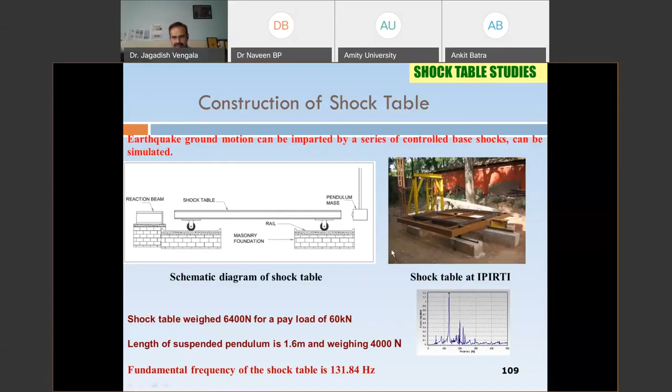When the table vibrates, if the fundamental natural frequency of the building matches with the fundamental natural frequency of the table, there may be failure, or sometimes you don't get correct values. So we designed the shock table such that its fundamental natural frequency comes to around 130 hertz or so. But when we tested the bamboo house, its fundamental natural frequency came to 13 hertz, almost 10 times less than the shock table's frequency.

This is the first model we constructed, model 1. It is 8 feet by 8 feet, and you can see the column to column spacing is 4 feet. There are 1, 2, 3, 4, 5, 6, 7, 8 columns in total.

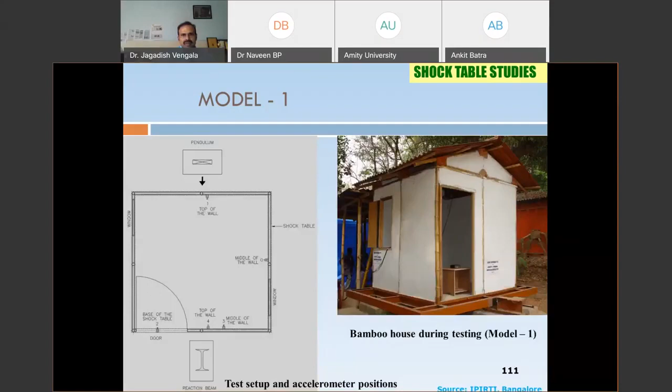This is the test setup, and we have mounted the accelerometers for each shock. When you keep a particular angle of the pendulum, say 10 degrees, it hits and generates a particular impact. When you change the angle, you're taking the pendulum higher, so the impact will be more. You have to calculate the cumulative impact energy and report the observations for each impact.

For this model, we gave 15 shocks with different pendulum angles, recording the relative energy. After the test program, we observed slight cracks, but there was no major structural damage noticed. You can see the slight cracks in the picture I've depicted.

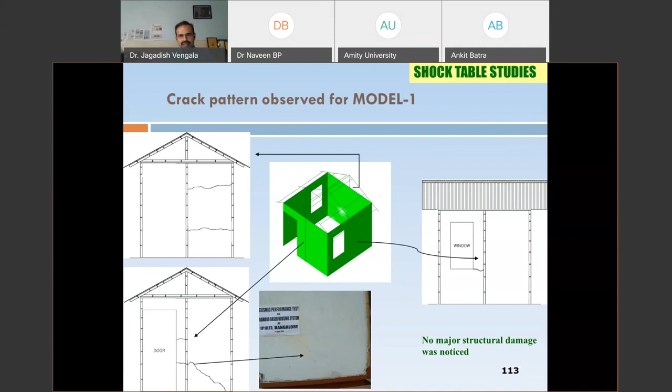Having checked one model, we thought of checking the repeatability. We had not checked till damage in either case, neither on the original shake table nor on this first model. So we decided to go for almost 5 times more impact, giving 50 shocks, to see what happens. You can see the number of shocks, the angles used, and the cumulative energy after giving 50 base shocks.

The pendulum will hit, and again we have kept a stopper so that it comes, hits, and then gives a rebound, so that you get both directions of the impact or the vibrations. Initially we measured using accelerometers. Once we got to a certain point, we removed the accelerometers and only checked the progress of the crack pattern.

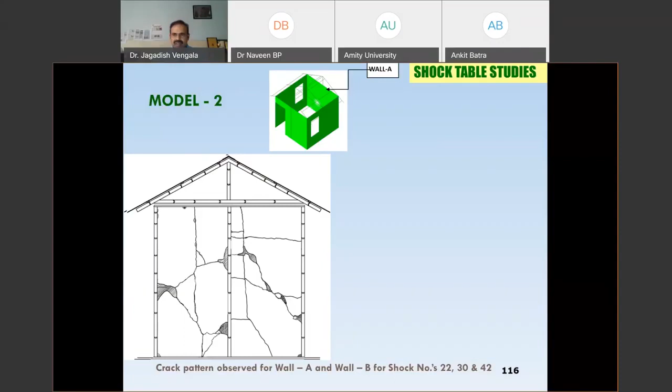This is the crack pattern observed after different shocks. You can closely follow how the crack widens from the 22nd shock to the 30th shock to the 42nd shock. This is at 22, then this is at 30, this is 42. So the crack widened at some places, the cement mortar got affected, and similarly this is wall B.

After that, this is shock number 50. You can observe the lines, exactly as I showed earlier. Here, there is a failure after the 50th shock, because we connected the entire house with a U channel to the shock table using nut and bolt, and then tack welding. So all the nut and bolts got sheared off because of the twisting. You can see this is the 50th shock we gave. There is a twist that happened, and a failure occurred, so we stopped at this point of time.

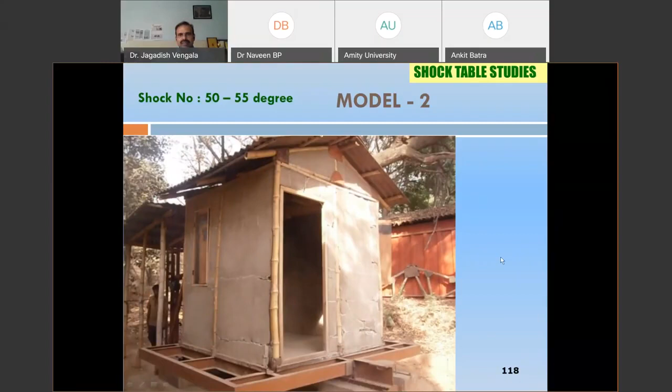This is the twisting of the house model, you can see it from the outside. If you see the bottom right corner of the picture, this channel should have been there in this corner, matching it. So this is the kind of twisting that happened - all the nut and bolts got sheared off, and then it got twisted. But there was no failure of the structure itself, actually the base got failed.

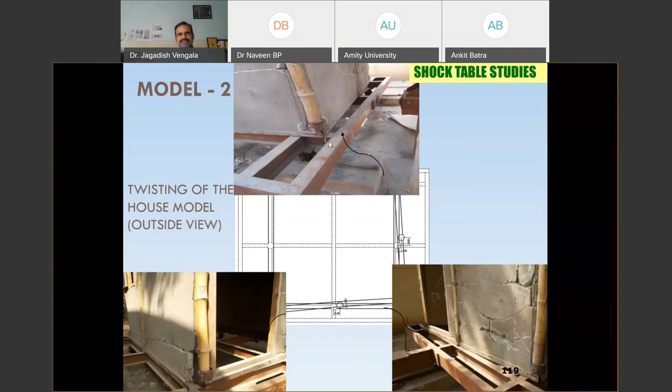This is a closer look of the building. In the earlier slide, this should be in line with this particular I-section, but it has moved, almost coming to the edge of the shock table. This is the crack pattern of the wall outside after the final, 50th impact. I have embossed the cracks into this image so you can see the crack pattern clearly.

So that is about the shock table studies.

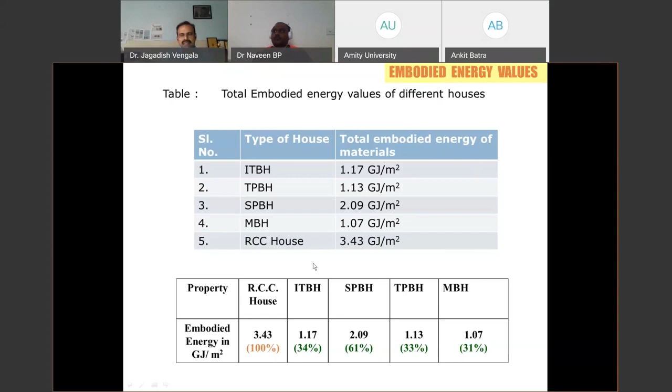These are the embodied energy values, calculated for different houses. We have the regular house, the IPIRTI-TRADA house - one with timber frame and bamboo composite, and another with steel frame and bamboo composite. There are also mud bamboo houses and an RCC house. When you compare embodied energy across these houses, all the bamboo houses are lower compared to the RCC house. And the cost is almost half that of the RCC house during that time, though cost may vary depending on the number of internal walls and so on.

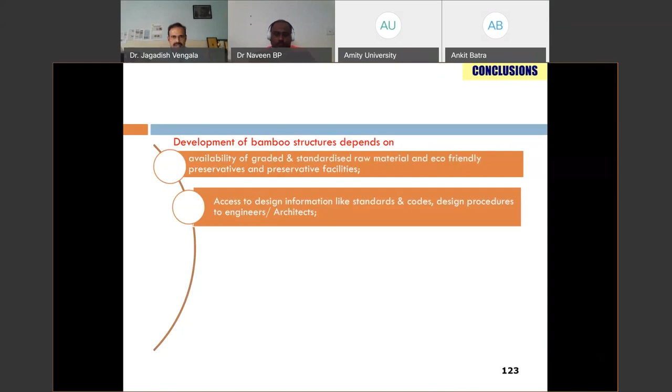Now I've come to the conclusion of my presentation. Whatever you do, the development of bamboo structures depends on the availability of graded material, and also requires eco-friendly preservatives and preservative facilities. You also need access to design information like standards and codes and procedures for engineers and architects, and you need to train manpower in this area.

That's why the Building Material and Technology Promotion Council - Dr. Sailesh Kumar Agarwalji is a very good friend of mine, we used to collaborate a lot earlier, and I'm still in contact with the BMTPC director - has promoted a lot of these technologies at various places. Particularly in the northeast, they have built some houses, keep training manpower, associate with NGOs, and the government is encouraging wider use of such buildings. BMTPC, as I mentioned, is under the Ministry of Urban Development and Poverty Alleviation.

So in the end, based on the shock table studies, it is evident that the structure can resist moderate to major levels of forces with minimum damage, compared with masonry or concrete structures.

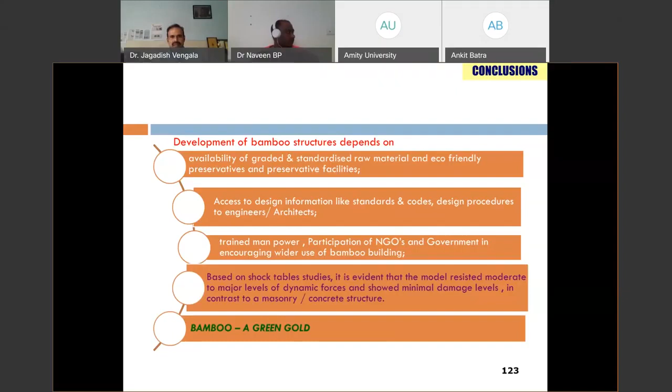So you can say bamboo is a green gold. These are some of the publications you can go through, you can just Google it. These are the references. You can Google my name and bamboo, and then contact me. This is my email ID and mobile number.

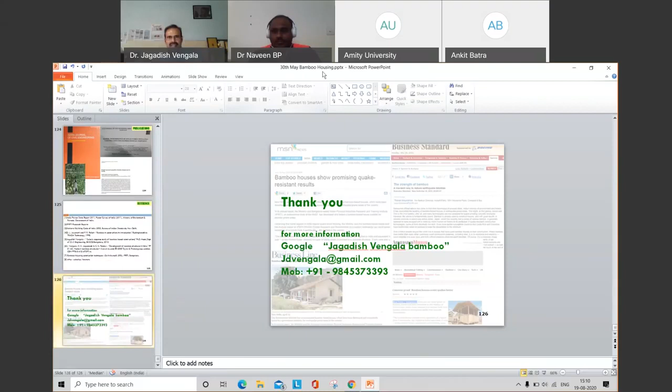Thank you, sir, thanks for your wonderful presentation. You have covered all civil engineering applications for bamboo. You have done wonderful research work, sir.